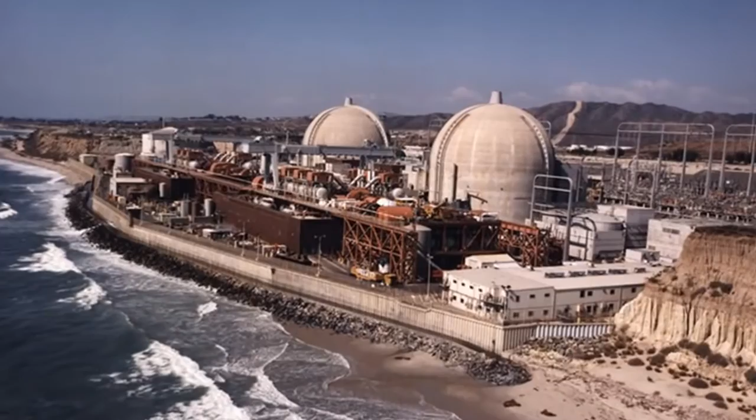So water-cooled reactors have to run at over 70 atmospheres of pressure. You have to build a water-cooled reactor as a pressure vessel. The number one accident people worry about: pressure is lost. Water that's being held at 300 Celsius flashes to steam. Its volume increases roughly by a factor of 1,000.

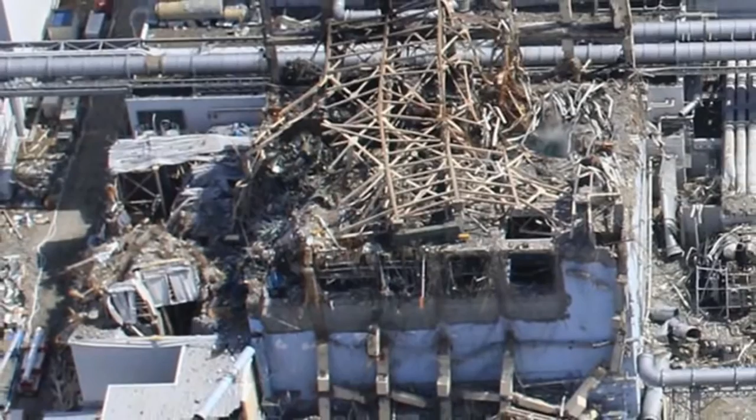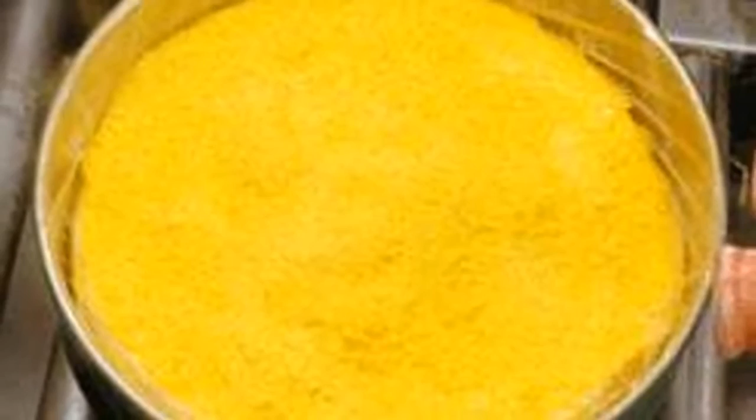If you don't get emergency coolant to the fuel in the reactor, it can overheat and melt. This is what drives the design of this building. So if this happens, all the steam is captured in this building. Now, the reactors we have today use uranium oxide as a fuel. It's a ceramic material, chemically stable, but not very good at transferring heat.

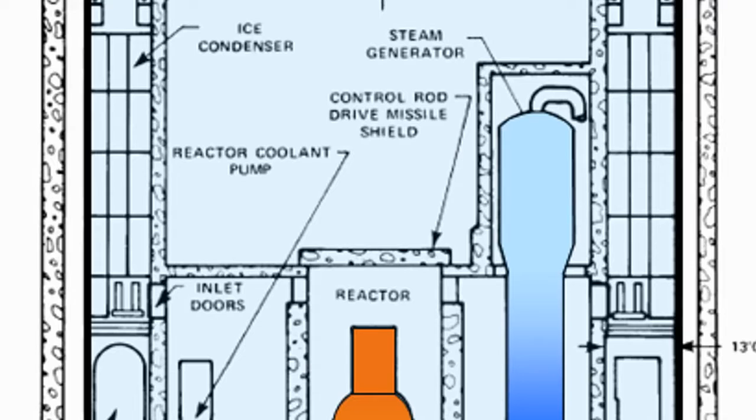If you lose pressure, you lose your water, and soon your fuel will melt down and release the radioactive fission products within it. So they have a series of emergency systems designed to always keep the core covered with water. We saw the failure of this at Fukushima Daiichi. They had multiple backup diesel generators, and each one probably had a very high probability of turning on. The tsunami came and knocked them all out.

People sometimes say, is nuclear energy safe? And the first thing I say is, well, which one? Thousands of different ways to do nuclear energy. Is the car safe? Well, which one? I had the good fortune to learn about a different form of nuclear power: the liquid fluoride thorium reactor.

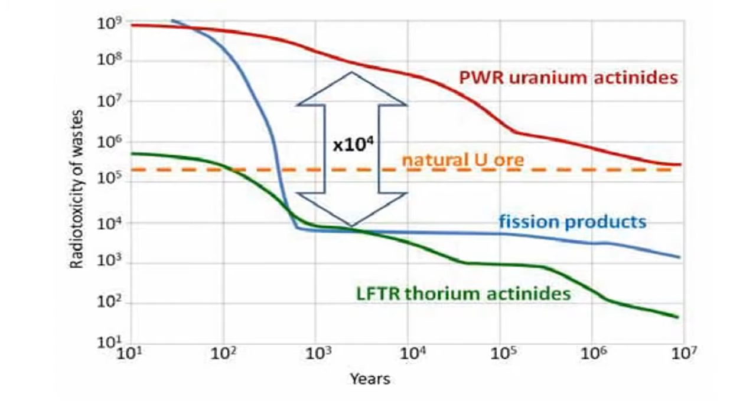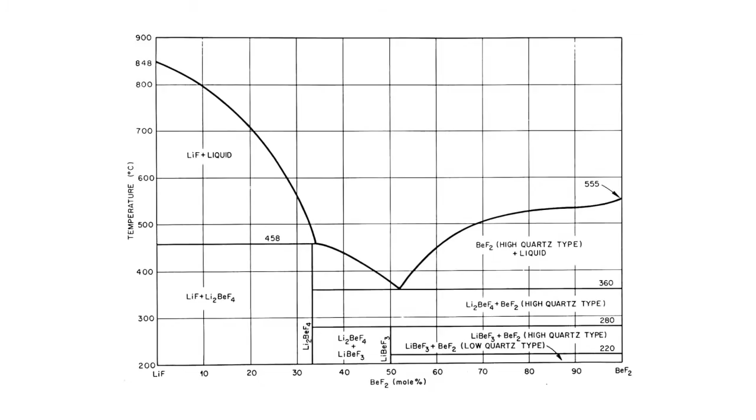We can fully burn up the thorium in this reactor versus only burning up part of the uranium in a typical light water reactor. It's not based on water cooling, and it doesn't use solid fuel. It's based on fluoride salts as a nuclear fuel. You have to heat them up to about 400 degrees Celsius to get them to melt, but that's actually perfect for trying to generate power in a nuclear reactor.

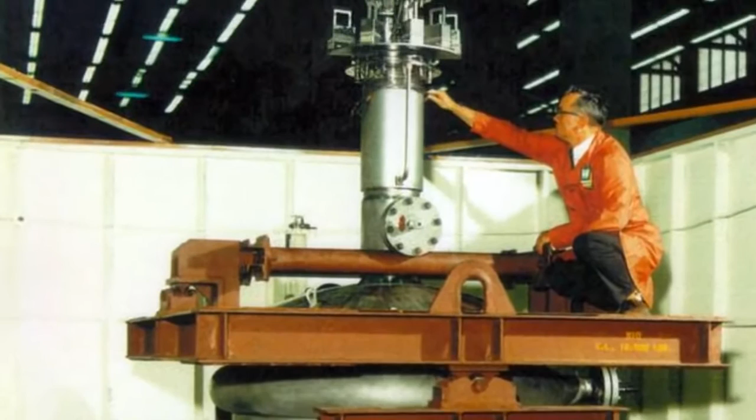Here's the real magic. They don't have to operate at high pressure. They don't have to use water for coolant, and there's nothing in the reactor that's going to make a big change in density. Unlike the solid fuels that can melt down if you stop cooling them, these liquid fluoride fuels are already melted. In normal operation, you have a little piece of frozen salt that you've kept frozen by blowing cool gas over the outside of the pipe.

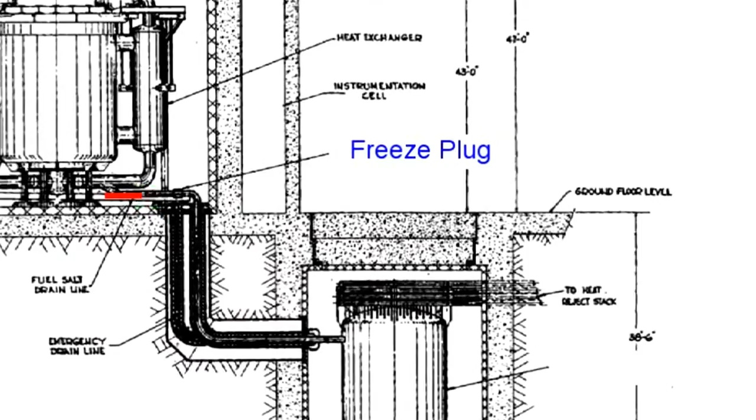If there's an emergency and you lose all the power to your nuclear power plant, the little blower stops blowing, the frozen plug of salt melts, and the liquid fluoride fuel inside the reactor drains out of the vessel, through the line, and into another tank called a drain tank.

In water-cooled reactors, you generally have to provide power to the plant to keep the water circulating and to prevent a meltdown. But if you lose power to the LFTR, it shuts itself down all by itself without human intervention. A staggeringly impressive level of safety, even if there's physical damage to the reactor.

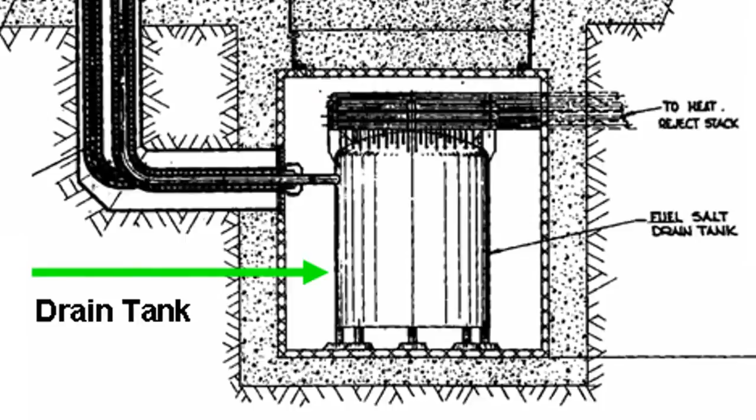Thorium is a naturally occurring nuclear fuel that is 4 times more common in the Earth's crust than uranium. It's so energy dense that you can hold a lifetime supply of thorium energy in the palm of your hand. We could use thorium about 200 times more efficiently than we're using uranium now.

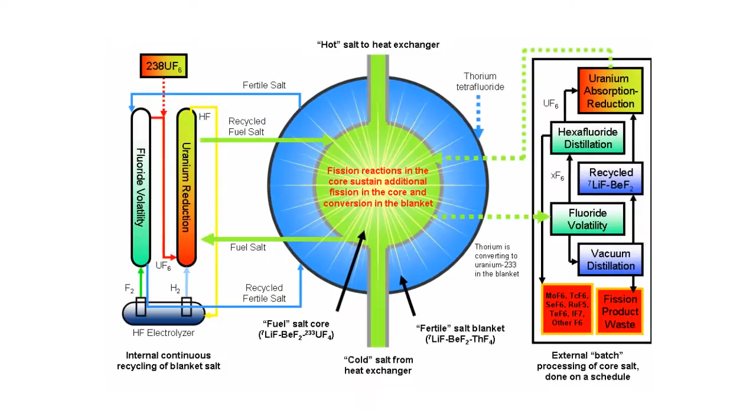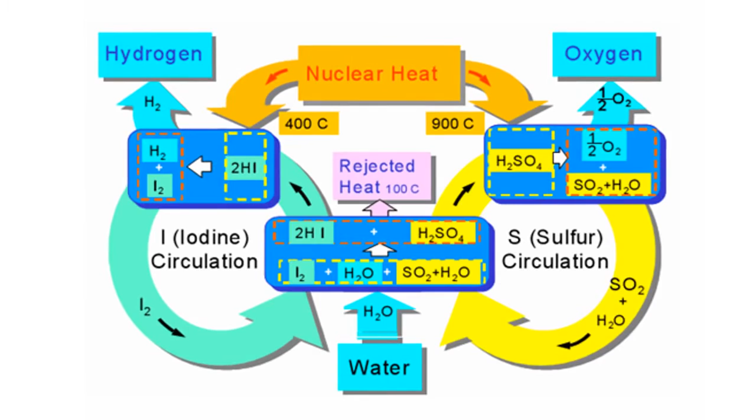Because the LFTR is capable of almost completely releasing the energy in thorium, this reduces the waste generated over uranium by factors of hundreds and by factors of millions over fossil fuels. We're still going to need liquid fuels for vehicles and machinery, but we could generate these liquid fuels from the carbon dioxide in the atmosphere and from water, much like nature does.

We could generate hydrogen by splitting water and combining it with carbon harvested from CO2 in the atmosphere, making fuels like methanol, ammonia, and dimethyl ether, which could be a direct replacement for diesel fuels. Imagine carbon-neutral gasoline and diesel, sustainable and self-produced.

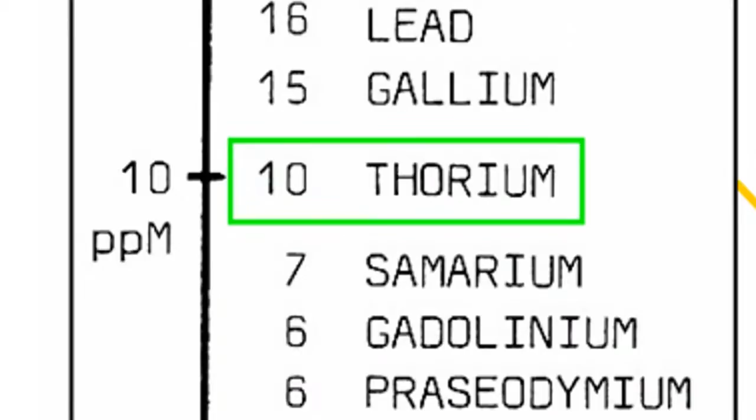Some people are kind of environmentalists, and they say, listen, nuclear power is not sustainable. We're going to run out of uranium. Okay, I will yield that point to you if we're talking about today's nuclear technology. In 2007, we used 5 billion tons of coal, 31 billion barrels of oil, and 5 trillion cubic meters of natural gas, along with 65,000 tons of uranium to produce the world's energy.

So I have a friend who's trying to start a rare earth mine in Missouri. Jim, how much thorium do you think you'll be pulling up a year? He goes, I think about 5,000 tons. 5,000 tons of thorium would supply the planet with all of its energy for a year. And he goes, there's like a zillion other places on Earth that are just like my mine. It's a nice mine, but it's not unique. It's not like this is the one place on Earth where this is found.

Every time mankind has been able to access a new source of energy, it has led to profound societal implications. Human beings have had slaves for thousands and thousands of years. And when we learned how to make carbon our slave instead of other human beings, we started to learn how to be civilized people.

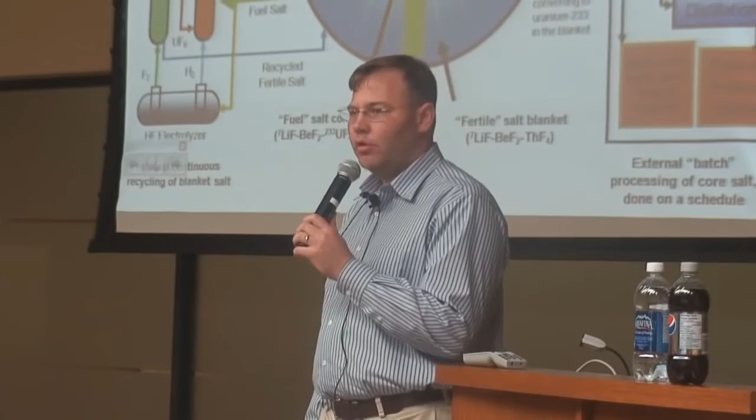Thorium has 1,000,000 times the energy density of a carbon-hydrogen bond. What could that mean for human civilization? Because we're not going to run out of this stuff. We will never run out. It is simply too common.